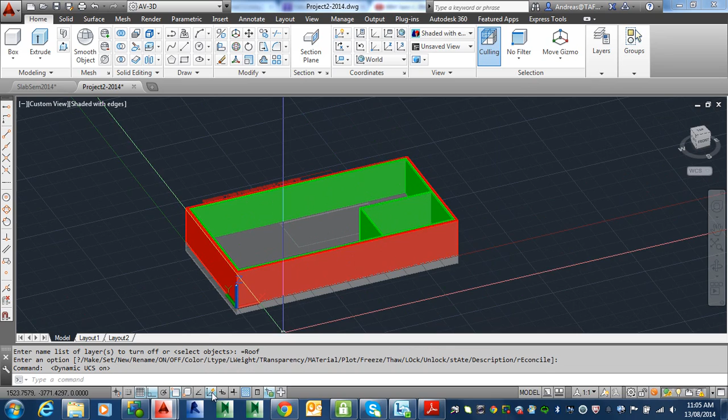Let's go back to the front of this thing here, whatever it is. Where's the front of it? I just put it anywhere, it can be anywhere. That's the front actually. All right, so let's put a door in here. I've just changed layer 0 before so that we can see the sketch on here.

So if I draw a rectangle here, like we did the other day, this will sense that here, and I can just put in, say the door is at 900 by 2100, like that, it'll just put that in there. It's a little tool. I can just move this down a bit, and I can just click and move it down a bit. Now I can push through there.

The problem is I can do press pull and that sort of stuff, which like that, and we'll go through there. It only goes through one layer of it. That's a problem. Then I have to somehow move this frame inside and push through the other way. So it's a bit of a problem.

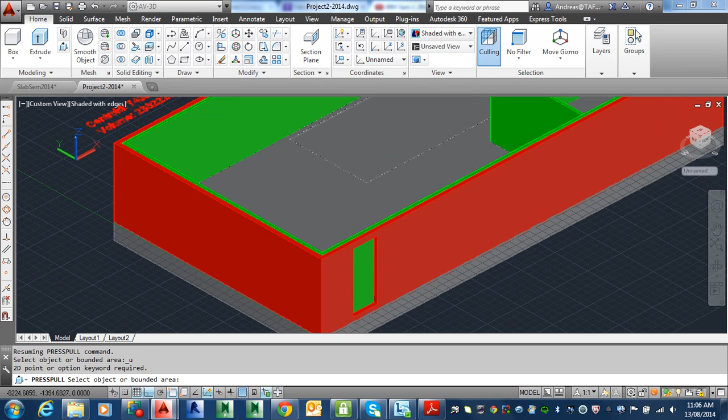Another way of doing it is to just undo that for a minute. Maybe another way is to use extrude, or use press pull if you want, but do it the unorthodox way, where you're actually picking up the perimeter instead of clicking in the middle. Let's see what that does. That didn't do anything, and I wasn't expecting it to. All it does is just an extrusion.

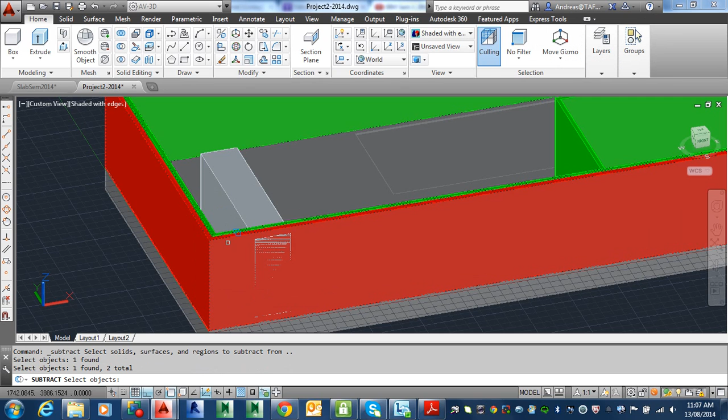But then I should be able to subtract. Let's just try that out, from this solid there, the green one, and the red one. All right, enter, this one here. All right, and that does it in one hit. And I think the problem is, it tends to change, it makes everything into one solid. So that is a problem if you want to keep your layering. So that's really, again, not the good way of doing it.

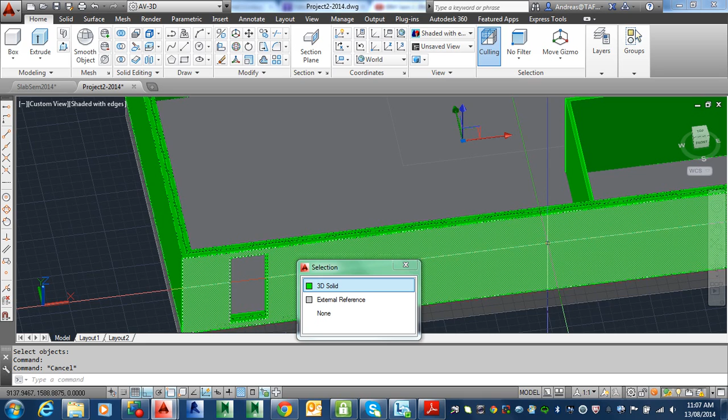So there's a number of ways of doing stuff, except you always find an issue with some of them. So let's take the dynamic UCS off and do it the traditional way, probably the better way. Because with this one here, we don't know how far away that door is from the corner or anything like that, and we can't start it from the corner.

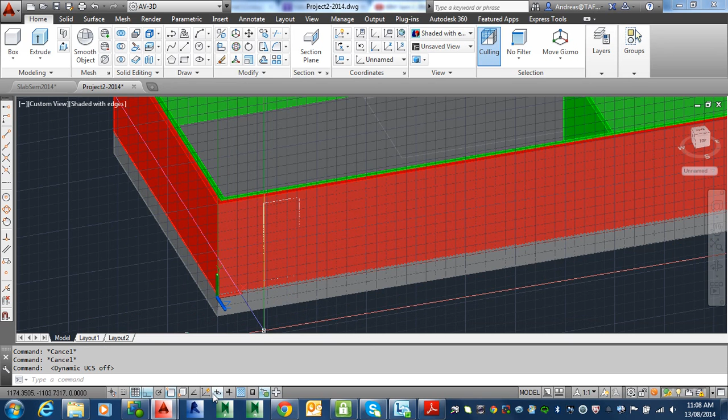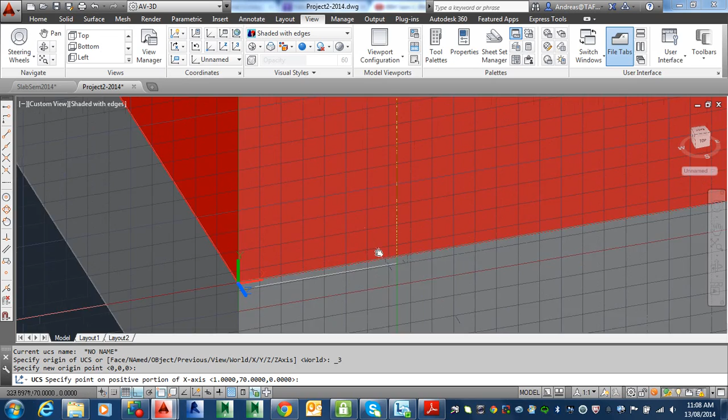So let's go the other way, turn this off. And what we'll do is use the UCS. Let's go to the view, use the 3-point UCS, and we're going to move the UCS to the corner here, right up there actually, well we can move it there. Not forgetting that this is actually 30 millimeters below zero. All right, so the X will be around this end, pointing that way. Okay, and the Y is going to be tilted up to the top here. All right, so now we've got this thing happening. You can't see the X red as well unfortunately, but X and Y are along this face here.

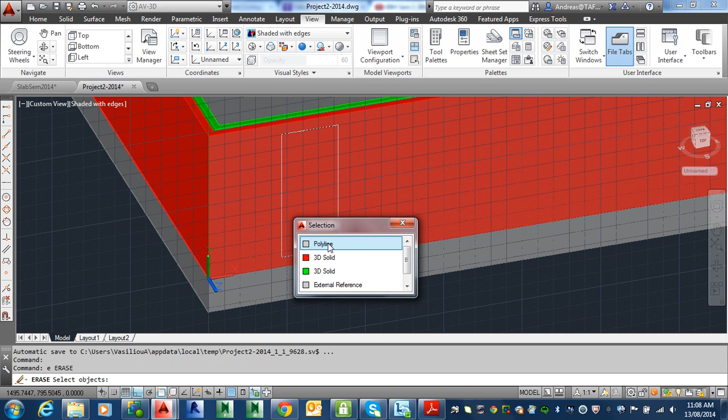So now I'll just erase this line here. And I have to click it twice for some reason, don't know why. Okay, enter, gone. Now what I want to do is put the doorway there in an accurate sort of situation, knowing where I'm going to put it exactly.

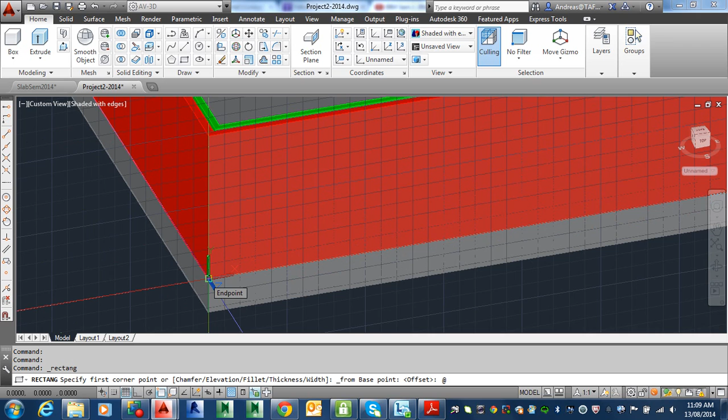So let's go rectangle. Now we've got an option of actually just starting the line right from there and then moving it afterwards, or we can just tell it, if we knew how far away from the corner the door was, we can just tell it immediately by using the from command. So I could go from, say from that base there, I want it at, let's say, 6,000 millimeters, comma, 30 up, remember, so we get to the floor level because we've got that 30 set down, so we can do that. So it's going to start it from there.

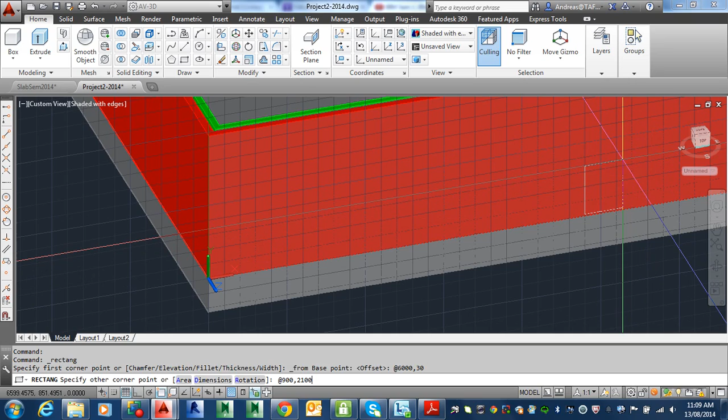That's exactly right. And then I'll give it the size of the door, which is, say, 900 nominal, comma, 2100 nominal, it's not quite that. All right, there it is. Okay, beautiful. All right, so that's where it is.

Now I'm going to do my press pull, same idea with windows. If we've got press pull, just go in the middle there and push through there, so that's through one layer. Now you've got to get the next thing right, and hopefully you've done exactly what I've done and allowed that set down to be 160 wide only.

Some people timed it at 130 and 170. Whatever your set down is, in other words, wherever the surface of this green wall begins is where you've got to copy this into. So we can then do another press pull for the green wall. So it's double work here to actually get it done. But anyway, it's not as simple as Revit.

So let's go with copy, or I can actually move that white line. I've got selection cycling on, so I want the polyline. Enter. Now, this is my X and Y and Z here. The Z is pointing outwards, and it's actually where I want to push it along the Z. All right, my X and Y are tilted along the wall.

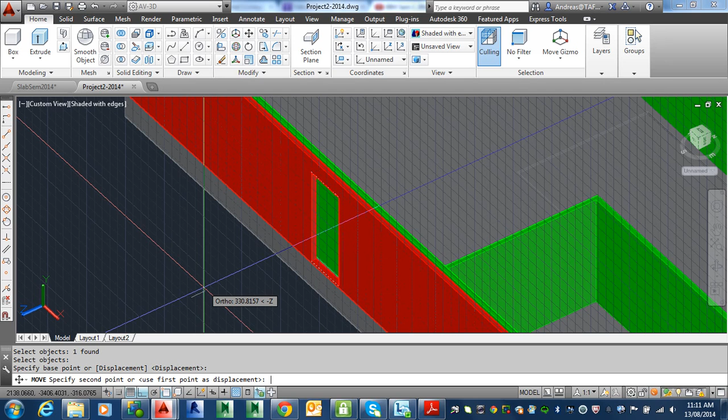So I want to move this line, so I'll just click somewhere here, along the Z, and if I go backwards, you see the minus Z appearing by my cursor there. I'll just type, because I'm going backwards, I'll type in... not 30, sorry again, 160, and it should go right on the surface of the green wall, which looks like it has. So now, if I zoom in, there it is.

Alright, so all I've got to do is press pull again through here. Hopefully... oh no, it worked, okay. And that line is just there, we can just delete that line, that rectangle. Alright, so let me just set my UCS back to world again, under the view tab, world there. Okay, here we go. So there it is.

There's an opening through here, finally. How hard is that? Yeah. And the thing is, you can't really shift it easily and that sort of jazz. Okay, there it is, so we've done that.

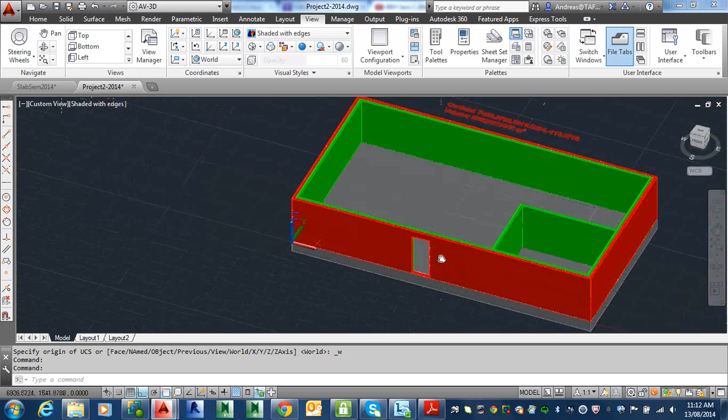There is a final thing to do with your XREF. We'll do that tomorrow, we'll talk about how to update XREFs and that sort of stuff tomorrow.